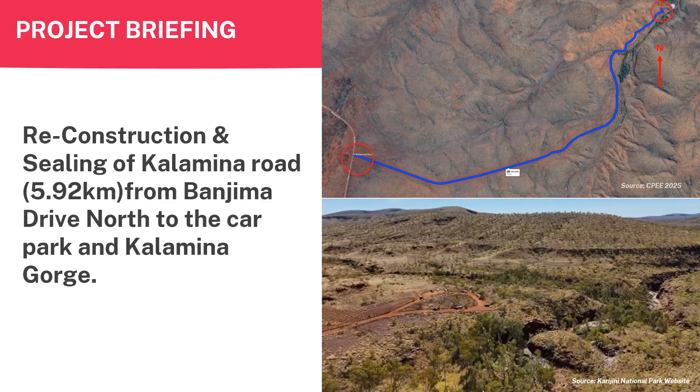We acknowledge the traditional owners of the land on which this infrastructure project is planned, the Banyjima, Kurrama, and Innawonga peoples. We pay our respects to elders past and present. We recognize their enduring connection to country, culture, and community, and their roles as custodians of the land within Karijini National Park. As part of our consultation and engagement with the traditional owners, I would like to respectfully share a cultural story that reflects their deep relationship with land and sky.

The story goes as follows. Windwuro is remembered as a powerful ancestral figure, an elder who had 7 wives, each representing a guided spirit. These women were given to help establish different tribal groups across the region, forming foundations of kinship, law, and shared ancestry among the Banyjima, Kurrama, and Innawonga peoples.

Their journey across the land is mirrored in the night sky, where a cluster of 7 stars travels together. These stars are seen as the spiritual presence of the women watching over the land and its people. The story reminds us that country is not just physical terrain, it is living, storied, and sacred. This story has been shared with permission and is included here to honor the cultural heritage of the traditional owners and acknowledge their enduring custodianship of the land on which this reconstruction and sealing project is being developed.

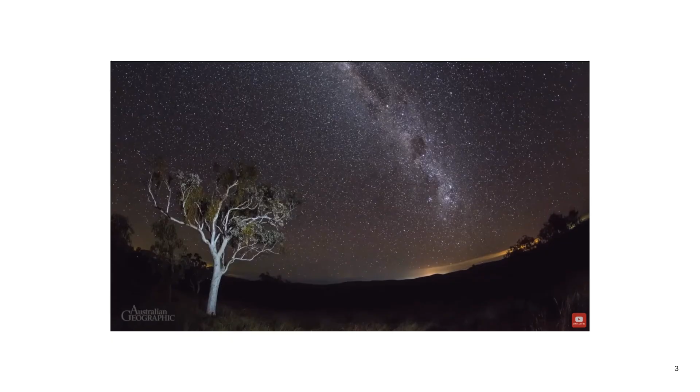The vastness of the place, the landscape being up in the highest area in WA. So you've got these vast areas of mountains, but you've also got these beautiful trees around us, the vegetation here. So it's arid, but it's still got plenty of vegetation, a whole array of different plants.

But also I think the ongoing Indigenous connection to this country is very important as well, where the traditional owners are still actively looking after country, the law's still strong. So I think it's just a whole range of things that makes this country really special.

I think the main attraction here is the gorges and the variety of different gorges that we have here, from places that are just such beautiful places such as Fern Pool and Fortescue Falls, where it's big shady fig trees and fern-lined water holes with little waterfalls tumbling in, and it's just the most picturesque sort of place.

But then we have the other side of it, the more adventurous gorges like Hancock Gorge, where it's just carved out of sheer rock. It's narrow, and the colours in the rocks, and just walking down through there, it really is an adventure to go down into those gorges. And I think that's the main attraction. But when people do get here, they're amazed at the vegetation and how beautiful the whole landscape is, really. And that's really, I guess, what brings people back as well.

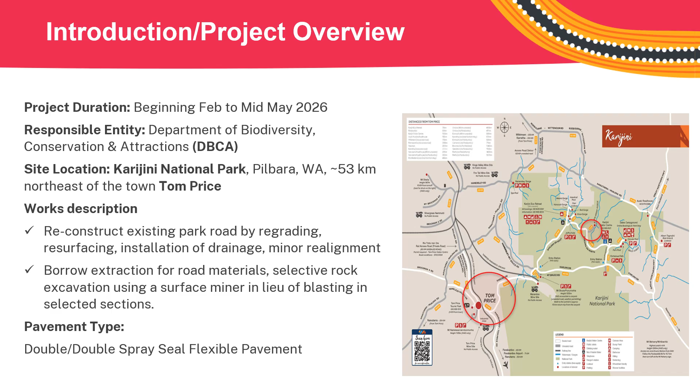The objective is to reconstruct the existing unsealed gravel road to a sealed road to allow hire cars to access the park. The works involve installation of drainage, water management, materials to be sourced from 2 pits within the park located on Banjima Drive, in conjunction with the use of a surface miner that is available on site. The pavement design is a double spray seal flexible pavement, and we'll now look at the project context and some key challenges.

This project is a subsection of a bigger 53-kilometer upgrade of unsealed roads within the park. The park attracts approximately 650,000 visitors per year.

The conservation of the park's fauna, flora, and cultural heritage, especially the gorges of the park, is of utmost importance and supports and aligns with the objectives of the Conservation and Land Management Act, hereafter referred to as CALM. Once completed, this project aims to deliver economic benefits to the region, local businesses, and residents.

To enable successful delivery, it is crucial to recognize key challenges, which include variable rainfall in the region, a restricted 6-week construction window, maintaining crossroad access for the threatened western pebble mound mouse, protection of the spinifex habitat, other fauna and flora protection measures, retention of specific trees, minimizing clearing, treatment of the clayey ground and subgrade, and addressing geometric challenges of steep grades and frequent erosion.

These have been risk assessed and some mitigation measures included in the final design or recommended for implementation during construction.

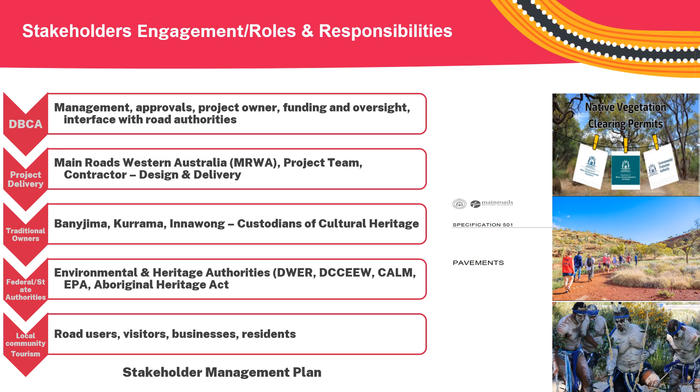Last but not least are the road users, the visitors to the park, businesses, and the local community, who are consulted and informed on project progress and issues, for example dust, noise, road closures, and any changes to speed limits.

We will now go through water and wastewater management. Unsealed road has historically suffered from erosion and surface deterioration due to inadequate drainage.

To overcome these challenges, 5 catchment areas based on topographical mapping and satellite imagery were identified, shown as C1 to C5 in the image. These catchments were assessed for scour risk and flow velocity was estimated.

To mitigate scour risks and based on the estimated flow velocities, protection measures for each catchment is recommended as per the table, based on Main Roads Western Australia specifications. The proposed protection measures include the provision of robust floodway treatments, installation of culverts, and diversion drains.

Upon assessment of the rainfall data, the outcome of hydrological investigation looking at the soil types, the design flows, and the required serviceability level, the structural and durability considerations, it was decided that a Type 3 floodway design is the best recommendation for Catchment 5.

The flow volumes and culvert sizing is based off hydrological modeling using Australian rainfall and runoff data. In the next slide, I've included a cross-section of the Type 3 floodway from the Main Roads Western Australia specification.

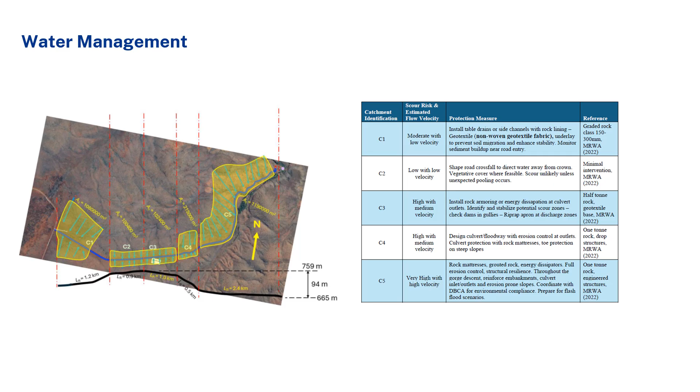The potential for flash flooding is the main driver for the Type 3 floodway design recommendation, as it can accommodate higher velocities, especially during tropical cyclones between December and March, where typical rainfall can be between 50 to 150 millimeters per day, as per the Australian Bureau of Meteorology data.

January and February on average are the wettest months of the year, while September and October are the driest. For these reasons, construction has therefore been scheduled during the drier months, April to May, to reduce erosion risk and avoid floodway disruption.

Water during construction will be managed by installing temporary diversion channels that will redirect flow away from active work zones, installation of sediment basins and silt fencing near ephemeral channels in catchments 1 and 3. Floodway crossings will be stabilized with temporary rock pads and geotextile layers.

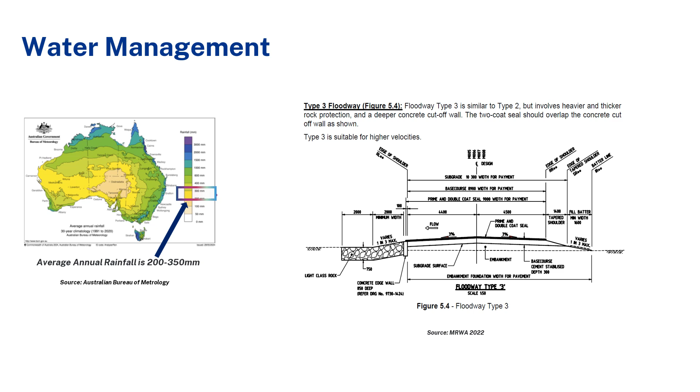The sourcing and management of materials on site, which includes stockpiling, preventing contamination, and reusing where possible, will ensure quality and performance outcomes for each element into which these materials are incorporated. We will now go on to discuss the sources, compliance, and suitability of available materials.

There are 2 pits, Pit A and Pit B, on Banjima Drive, close to the site. Main Roads Western Australia specifications for pavement allow materials from the Pilbara region to be utilized for pavement construction, and have been assigned different specification limits.

There is a surface miner available on site, which is quite useful as it can be used to produce compliant fill material for the gravel overlay, and can also be used to blend materials where required. The advantages of using the surface miner are that it is capable of grinding material in situ, reduces dust, extraction is vibration free, and is ideal in an environmentally sensitive area like the park where blasting is restricted.

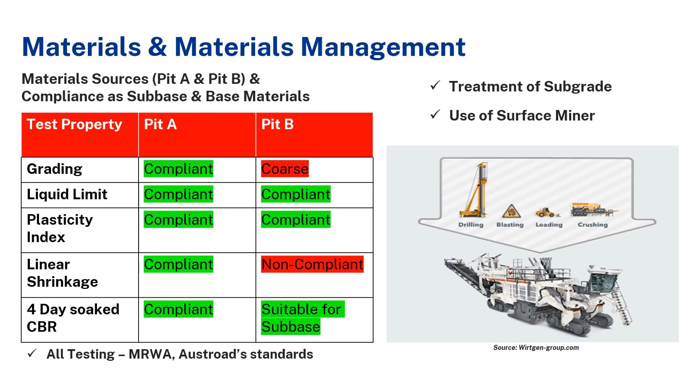Next on the agenda is risk management.

This framework is to be used for ongoing identification of hazards and/or risks during the duration of the project, and this can be related to safety, quality, environment, or anything relating to achieving sustainability outcomes.

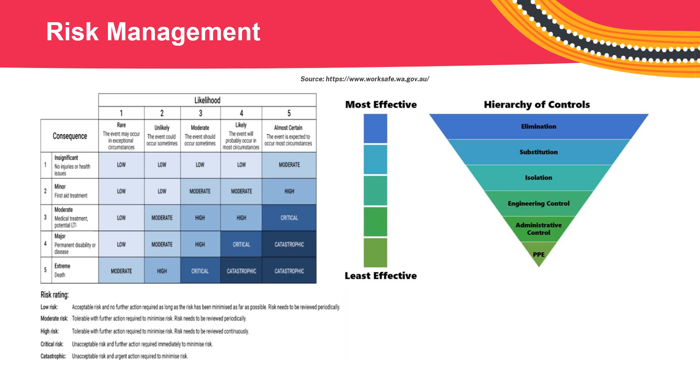A risk register is to be maintained, and regular reviews and debriefs are required to prevent recurrence. Lessons learned are to be shared and implemented as best practice for future projects.

We will now look at the project schedule and site management.

The project is scheduled to start at the beginning of February with pre-construction planning activities. These include project approvals, including statutory licenses and permits for water, gravel pit extraction, floodway and clearing permits, DBCA approvals, environmental permits.

Engagement of DBCA approved ecologists is important for the survey regarding the Western Pebble Mound Mouse, other fauna and flora. Compilation of the stakeholder engagement plan, the project quality plan, the environmental management plan, safety plan, and traffic management plan. Also includes the confirmation of the final design and specifications with Main Roads Western Australia.

Establishment of camp and site facilities, the pre-clearance fauna and flora management, mobilization of plant and equipment, which include the graders, bulldozers, water carts, rollers, surface miner, and then vegetation clearing.

Main construction work starts with the survey set out in pre-works, followed by drainage and floodway works, and then earthworks and subgrade construction in early April.

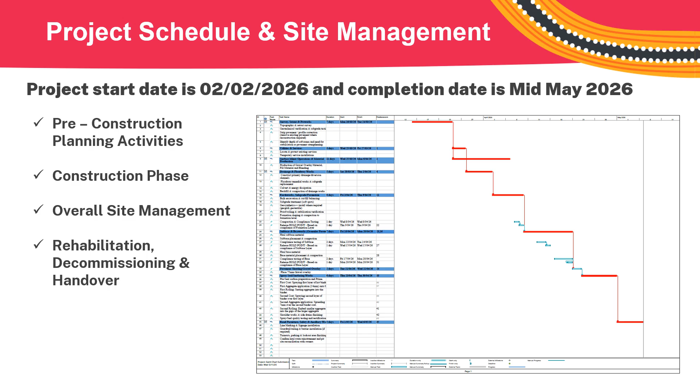For successful delivery of the project, it is recommended that the contract be awarded to a competent and experienced contractor, preferably someone who has previously delivered a remote road construction project in a national park.

It is also important that only compliant materials be incorporated into the works. Ensuring ongoing consultation and stakeholder collaboration as per the stakeholder engagement plan. Compliance with all statutory regulations, acts, permits, licenses, and specification requirements.

Embedding key project management principles of cost, quality, and time to prevent delays, minimize remedial works, and deliver the project within budget. In conclusion, it is expected that the project will deliver the following: improved safety and reliability for tourists

and service vehicles, reduced maintenance costs for DBCA, enhanced visitor experience and tourism growth, protection of environmental and cultural values through sustainable construction practices followed throughout the project duration.